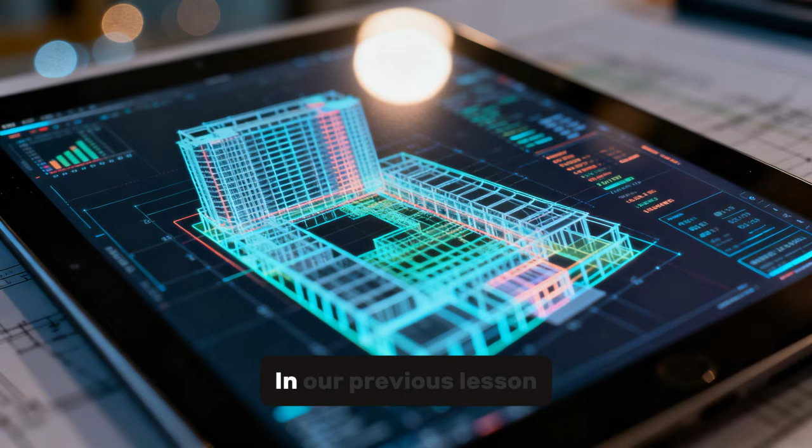In our previous lesson, we defined the what, the nature of BIM as a data-rich process. Today, we move straight into the why. Specifically, we are looking at the historical issues of the construction industry and the global drivers that have made BIM an absolute necessity. If you don't understand the failures of the past, you are doomed to repeat them.

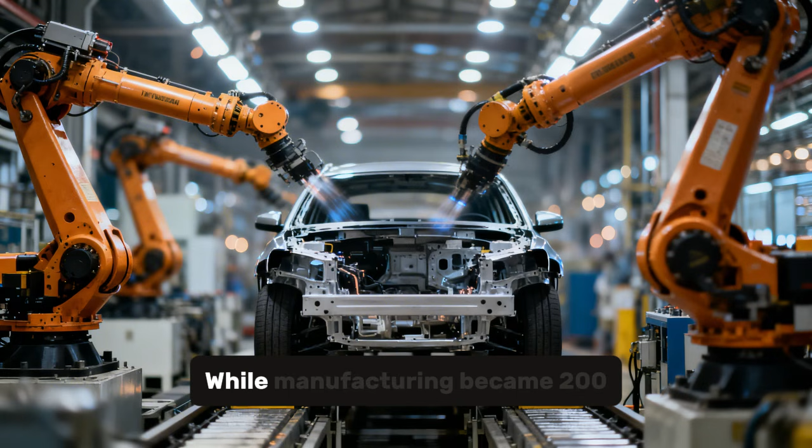For nearly a century, the construction industry has been the sick man of the global economy. While manufacturing became 200% more efficient through automation, construction actually became less productive. Why? Because for over 100 years, we relied on a fragmented paper-based workflow. Historically, architects, structural engineers, and quantity surveyors worked in silos.

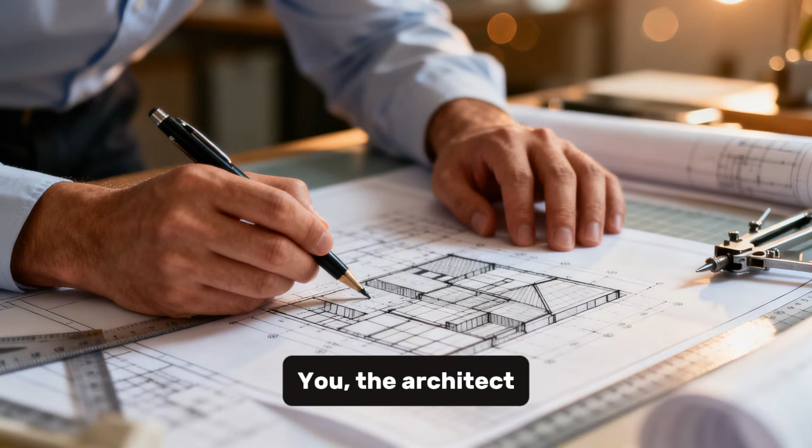You, the architect, would design a beautiful building in your office. You'd print the drawings and send them to the structural engineer. The engineer would then do their calculations, often ignoring your specific aesthetic details because they were just looking at load-bearing points. This led to information loss.

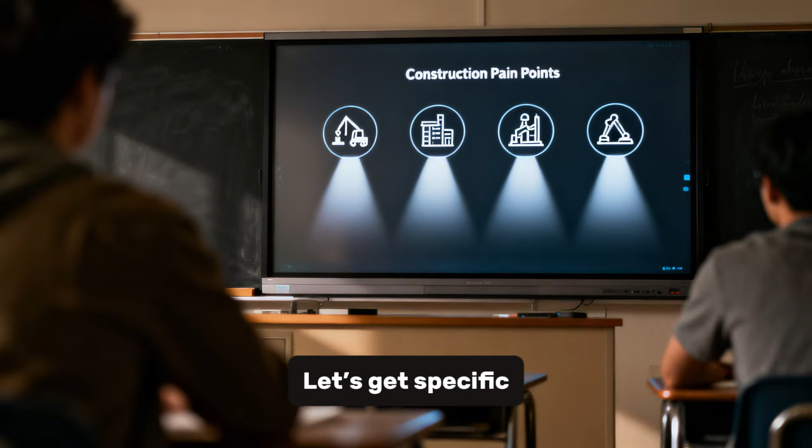Every time a project moved from one professional to another, about 30% of the relevant data vanished. By the time the contractor got the drawings on a site in Lagos or Port Harcourt, they were looking at a guess rather than a coordinated plan. Let's get specific. There are 4 major historical pain points that forced the world to move toward BIM.

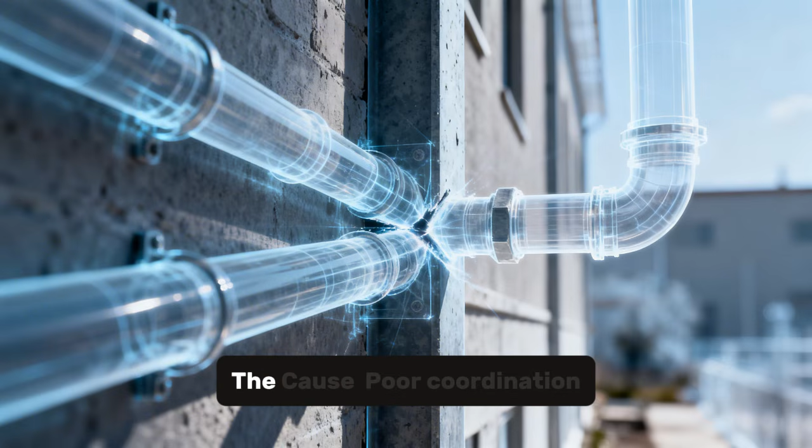Historically, up to 30% of construction costs were attributed to rework. This means building something, realizing it's wrong, tearing it down, and building it again. The cause: poor coordination. For example, a plumbing pipe hitting a structural beam. The BIM solution: clash detection. We find the clash in the digital model for 0 naira, rather than on-site for 5 million naira.

Because the traditional process was so fragmented, when something went wrong, the first thing people did was hire lawyers, not engineers. The architect blamed the engineer, who blamed the contractor, who blamed the client. The Nigerian context: think of the many abandoned projects you see across our cities. Many are not just due to lack of funds, but due to legal disputes arising from variations and scope creep, classic symptoms of a lack of a single source of truth.

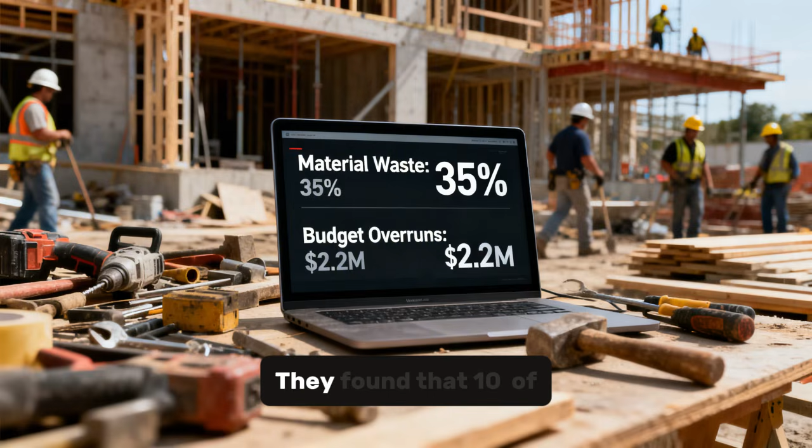Construction is famously wasteful. In the 1990s, the Egan Report and the Latham Report in the UK highlighted that the industry was dysfunctional. They found that 10% of materials were wasted on site and 40% of projects were over budget. Historical failure: we were using 2D drawings to describe 3D buildings. You cannot accurately calculate the volume of a complex curved wall using a 2D plan.

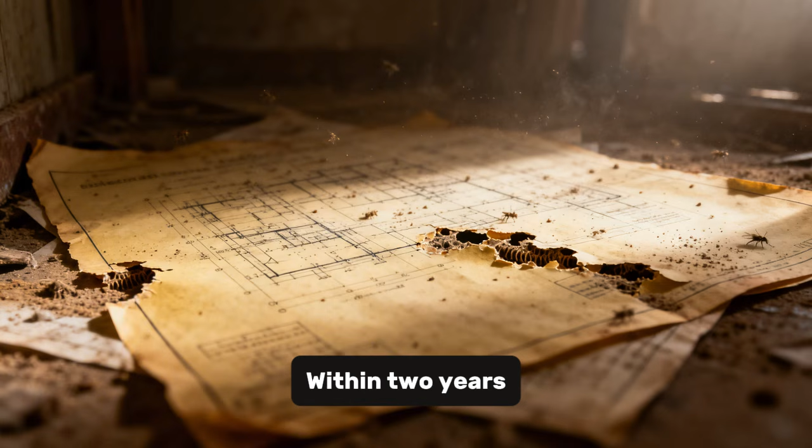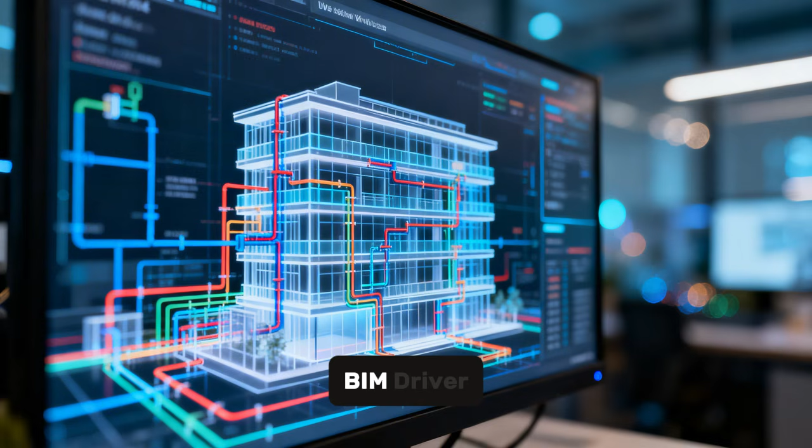Historically, once the building was finished, the architect handed the client a box of paper drawings. Within 2 years, those drawings were usually lost or destroyed by termites. When a pipe leaked 5 years later, the facility manager had to break the wall just to find where the pipe was. BIM driver: the need for a digital legacy, a model that lives as long as the building.

Around the turn of the millennium, governments realized that if they didn't change the industry, they would go broke building infrastructure. This led to global drivers. The UK mandate, the world's benchmark. In 2011, the UK government published a construction strategy. They realized they were paying too much for schools and hospitals. Their driver was cost reduction, 20%. They mandated that by 2016, all public projects must be BIM Level 2 compliant. This forced the entire global supply chain to learn BIM.

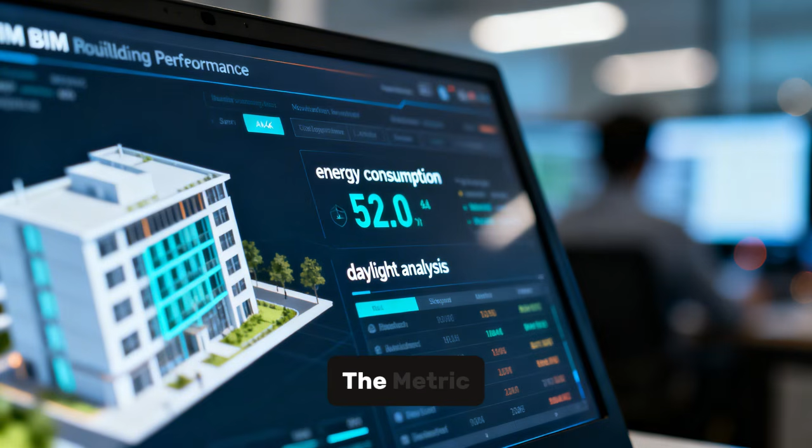The sustainability driver: the green agenda. Climate change is a massive global driver. We can no longer afford to build buildings that leak energy. The metric: you cannot manage what you cannot measure. BIM's role: BIM allows for building performance analysis. We can simulate how much carbon a building will emit before we even buy the land.

Global competitiveness: if a Nigerian firm wants to design a stadium in Qatar or a high-rise in London, they can't show up with AutoCAD files. BIM is the global language of construction. To participate in the global economy, you must speak the language. Now, let's talk about us. Why is BIM so critical for Nigeria specifically?

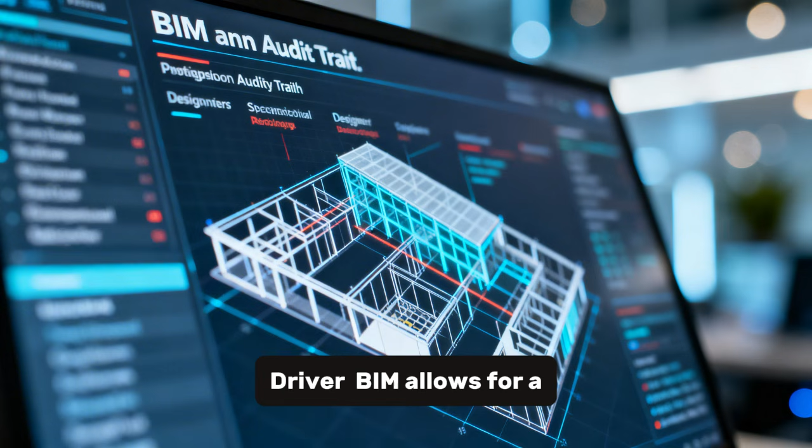Preventing building collapse. This is our greatest shame as built environment professionals. Every time a building collapses in Lagos or Abuja, it is often due to a failure in coordination or compliance. Driver: BIM allows for a digital paper trail. You can see exactly who designed which beam and whether it was checked. It forces a level of discipline that traditional methods lack.

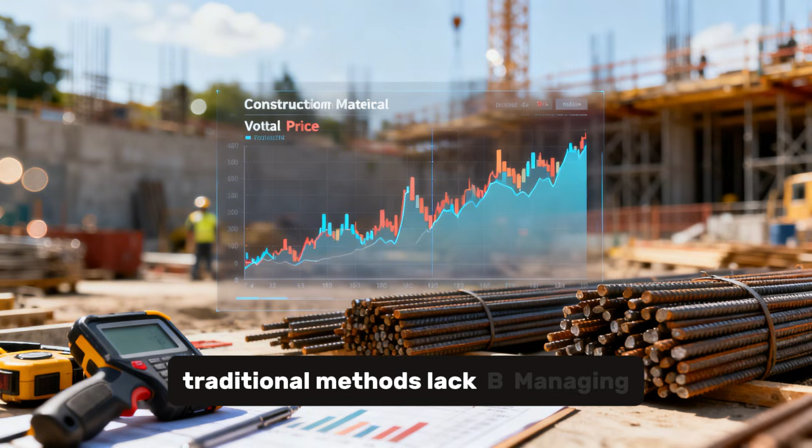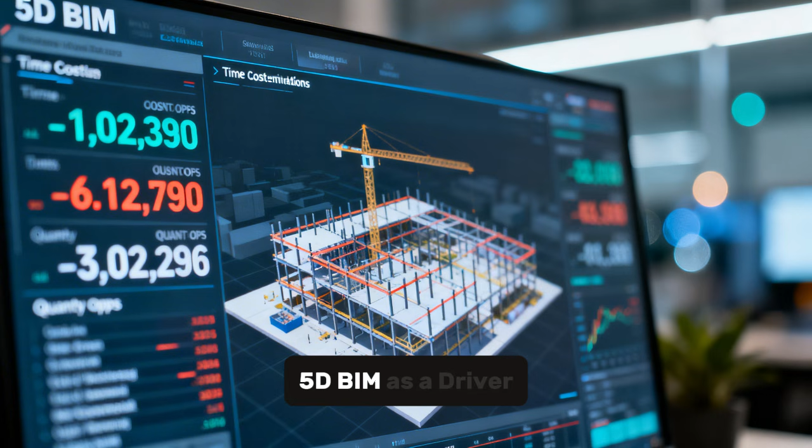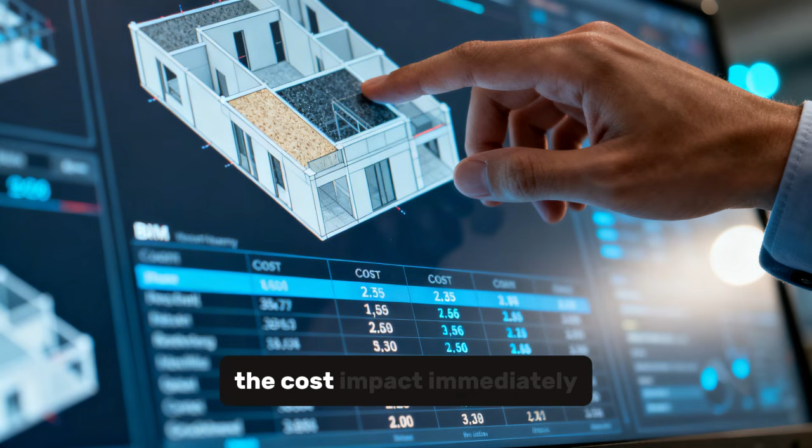Managing inflation and cost volatility. In Nigeria, the price of iron rods or cement can change between Monday and Friday. 5D BIM as a driver. Because BIM gives us automated, real-time quantity takeoffs, we can react to price changes instantly. We can swap materials in the model and see the cost impact immediately, helping our clients make faster decisions in a volatile economy.

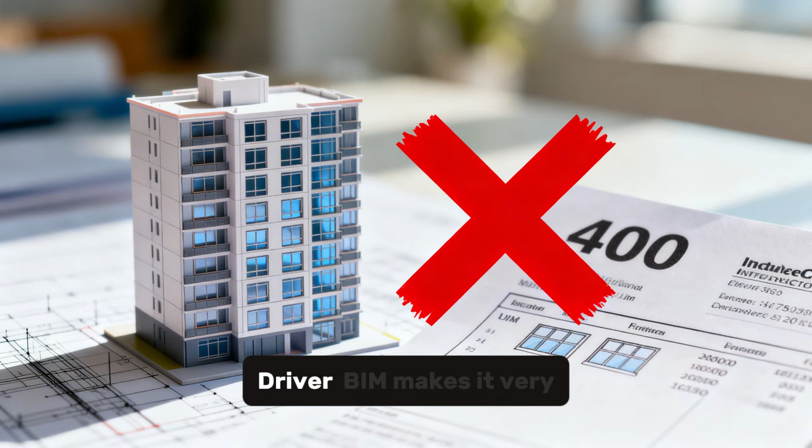Transparency and anti-corruption. One reason projects in the public sector often go over budget is ghost quantities, charging for materials that were never used. Driver: BIM makes it very hard to hide. If the model says there are 400 windows, you can't easily bill the government for 600. It brings transparency to procurement.

Research from organizations like BIM Africa and the Association of BIM Lagos shows that while awareness is high, actual deep adoption is low. Most firms are still in lonely BIM, where the architect uses BIM but doesn't share the model with the engineer. This is a historical hangover. We are still afraid to share our data because of IP concerns. But listen to me, the value of BIM is in the collaboration, not the 3D model itself.

I wouldn't be a good professor if I told you it was all sunshine. There are real historical reasons why people resist BIM. 1. The learning curve. It is steep. It's not just a software, it's a change in your brain's operating system. 2. Infrastructure issues. In Nigeria, we deal with the triple threat: unstable power, slow internet, and high software costs. 3. Interoperability. Sometimes the architect's software doesn't talk well to the engineer's software. This is why we rely on IFC, Industry Foundation Classes.

To wrap up, we've looked at how the historical issues of fragmentation, waste, and lack of productivity created a perfect storm that necessitated a new way of working. We saw that global drivers like government mandates and sustainability goals are pushing the industry forward, and that in Nigeria, BIM is our best hope for solving issues of building collapse and cost management. You are the generation that will bridge this gap. You are moving from an era where we drew buildings to an era where we manage buildings.